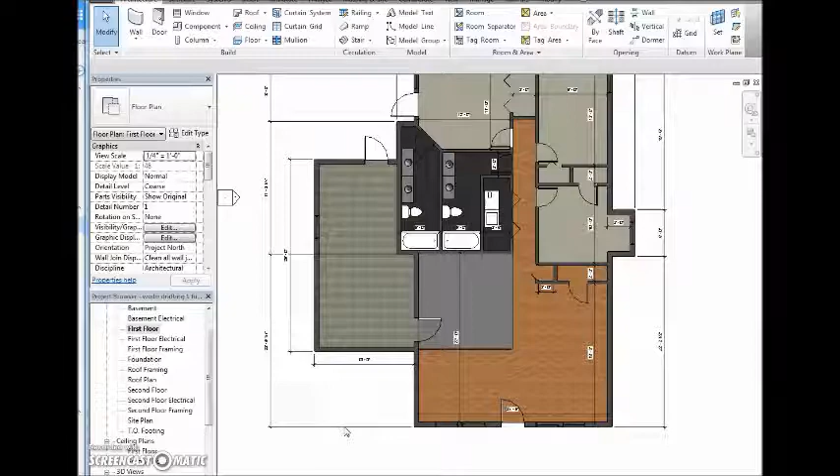All right, guys, quick question for you. What did the fly say to the fly swatter? Nothing, flies can't talk, come on. Who do you think I am, stupid or something? Jeez. You guys, you're killing me here.

Okay, so we're going to do our kitchen now. Best way to start the kitchen is to place your appliances in first. We're going to do this a few different ways based on whatever you want to do with your kitchen.

If you want to go basic, you can click on the component button, and down here you'll see sinks, which you'll have to put in, refrigerators, dishwashers, and a stove someplace too. But I like going to Revit City and doing that. If you want to go the easy way, that's fine too, I could really care less.

Maybe some of you guys would like to sleep in some, but I'm going to go to range. Range is usually the best thing to find. The one I usually like using - here's a killer one right here - but I want this wolf range right here. It looks really cool, it's got red knobs on it. That's kind of my favorite one, so use that one if you want to.

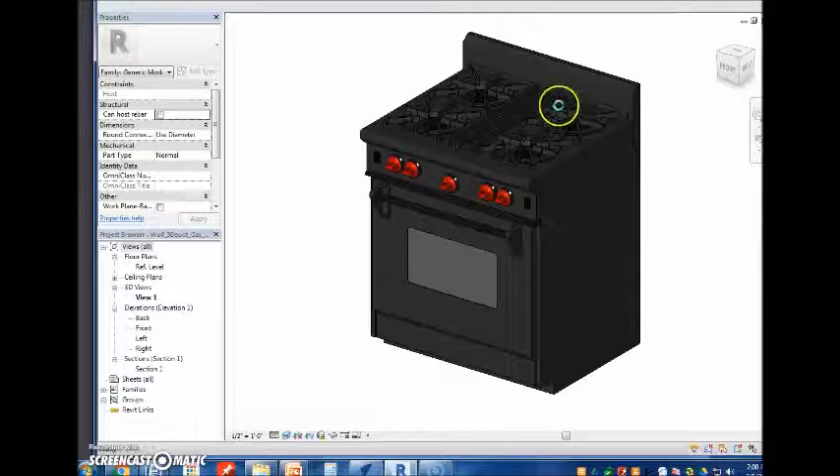Okay, spacebar is rotate. The back of your rotation object is where your cursor's at there. I'm going to dump this right here in the middle. Don't put it too close to your door because that would make no sense. Your range would typically go over here, your sink over here, because you have plumbing already installed. So if we want to get technical with this thing, that's where that goes.

Okay, I'm going to use the default sink, but the stove - let's go back to Revit City, and we will find a refrigerator. You can see I've spelled it out many times, sometimes right, sometimes wrong. Find a refrigerator that you like - I like the side-by-side one.

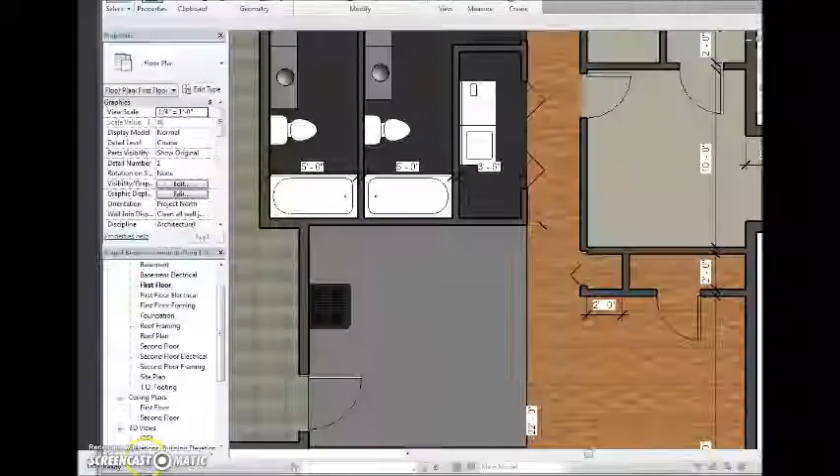Download now like you have. There you go, upgrade model. There it is, load in project. Hopefully you know how to do this, that's why I'm going a little faster. Okay, you see those little lines? That's the front of it. I'm going to dump this right here.

Okay, now sinks. Sinks can get a little finicky, but let's go ahead and dump the default one in here. Sinks are not very fancy, they're all about the same. I'm going to dump this right here, and I'm going to move things around as I feel I need to.

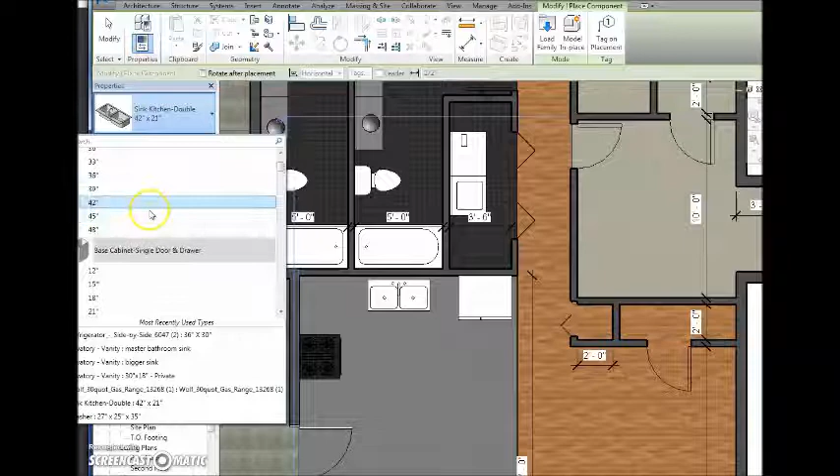But the next thing I need are the countertops - actually, let's do cabinets first. So under components, you need base cabinets first. Base cabinets are located here at the top. You should always put a 42-inch base double door cabinet under your sink, and just kind of center it right in there, and bump it up against the wall as close as you can. Now a lot of this is going to be eyeballed and guessed and things like that.

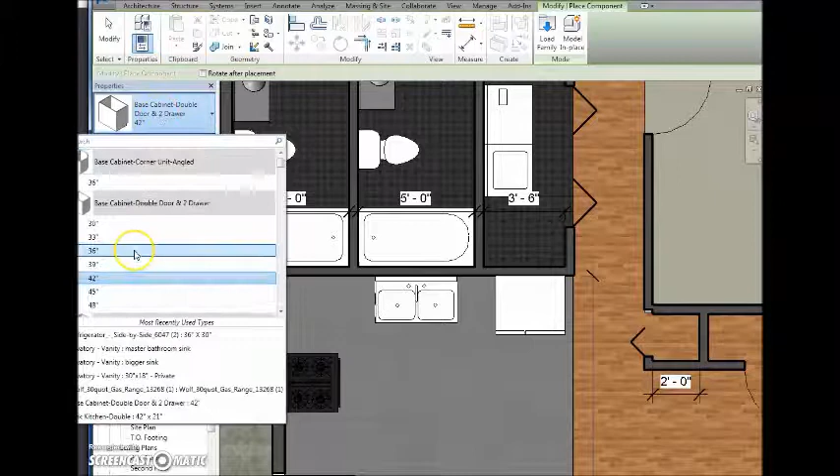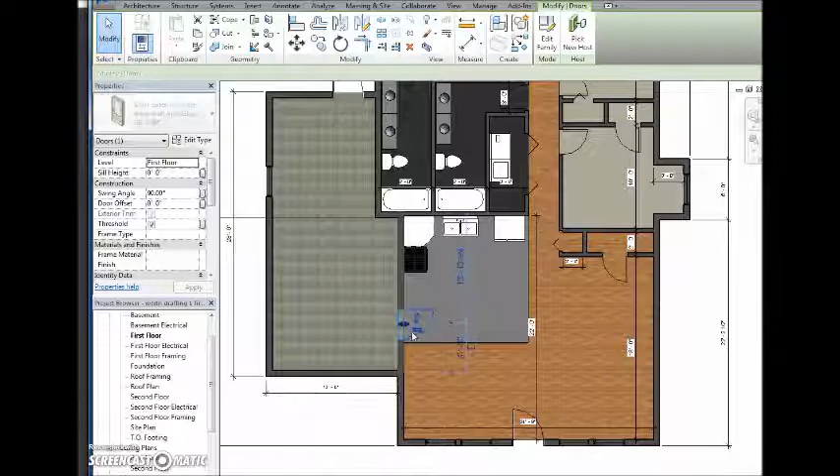The next thing I typically like doing is a corner cabinet - I'm a fan of those. If you're not, you can do your own thing. I like the base corner cabinets, spacebar to rotate it. If you have to move your stove over one way or the next, I'm probably going to move mine up here so it's next to there. You are allowed a little spacing in between there, that's fine. If you want to move your door down, if you decide you want more room here, you're welcome to do that - hopefully it doesn't mess with your roof much. But try to keep your door on the tile. So I give you guys a little freedom to move around.

Alright, so up here, this is a very tight space here. Let's see if I can fit a smaller cabinet in there - a 12-incher, close. You may have to move some stuff over to make it work, but I'm just using the arrows to toggle things. There we go, move this over a little bit more, that way that looks nice. There we go, need to put one more right here. I don't know what your measurements are, you might be the same as mine. 24 inch, too big.

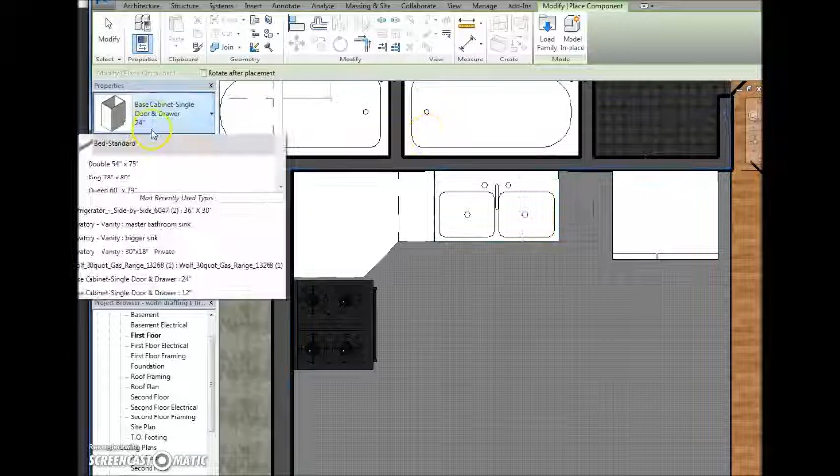18 inch, just right, should be a really tight fit. I'm going to do some 18 inches right here to finish out my other counters. That should be about fine. Make sure they're lined up, try to move them back.

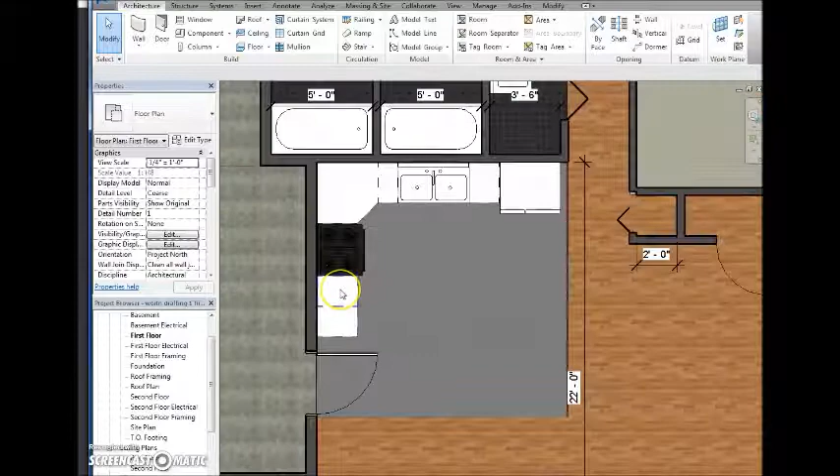Let's do a camera view so you can see what it looks like so far. To do a camera view, go to the little house thing up here, and under that is camera. Click in front of whatever you want to view, draw out your mouse, and now you have a camera view.

So it doesn't look too bad so far. You see how it's laid out. Don't worry about the fact the sink is risen above it. Once you put the countertop on, it should level it off.

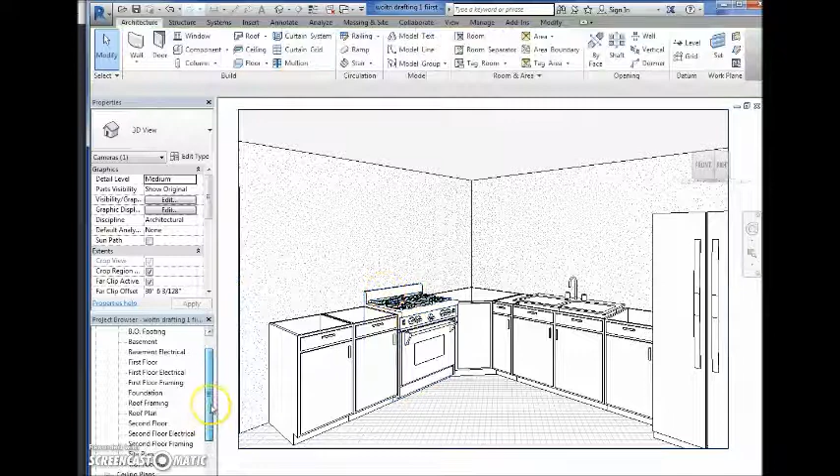But now I need to do a countertop. So click first floor. I'm going to do this in a way I've never taught it before, because another student of mine showed me how to do this. I thought it was a really cool idea.

We're going to sketch in the actual countertop in order to keep from having to move around all the buttons, which I think is going to be a little bit easier.

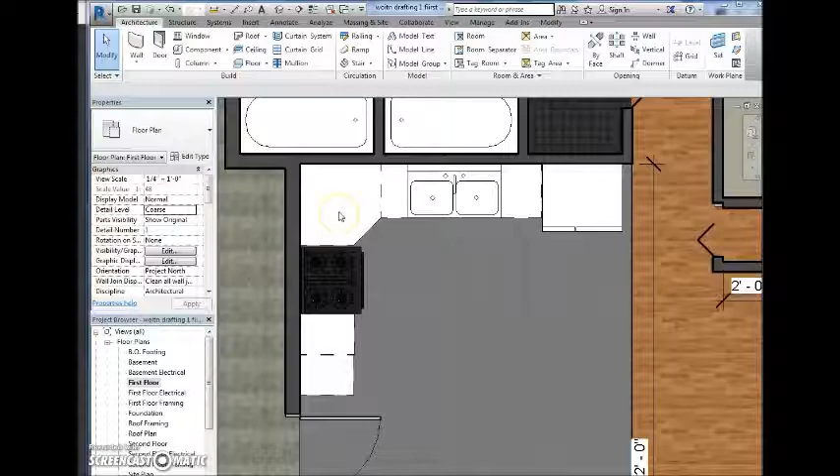Okay, let's go find some countertops. Go to components, we'll do the straight one first, that's the easiest one. Go to load family.

Press spacebar to rotate it. You're saying it's too big width. I say that's fine, just notch it in there.

Bring it down so it doesn't cover your stove, and it should be right there. You usually have a little bit of an overhang right here, but if you're not, that's fine.

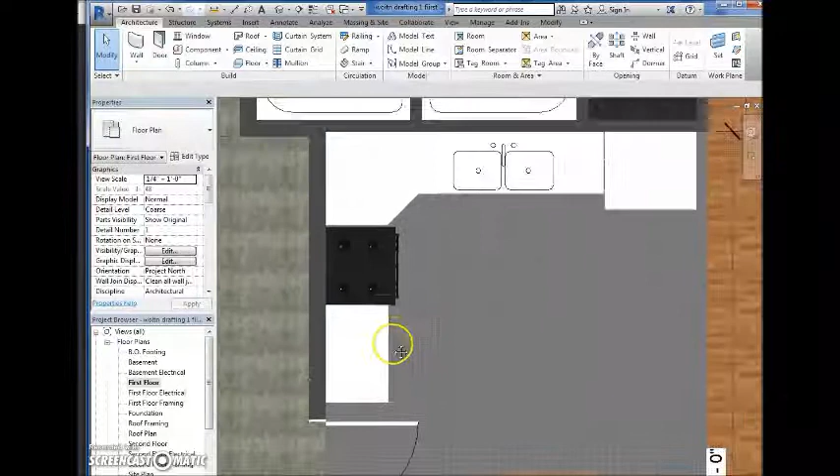That's the easy one, here comes a hard one. Go back to component, go to load family, go back to casework. Now, since we have an angled countertop with that funny looking corner, we have to do this one right here: the L-shaped with sink hole 2.

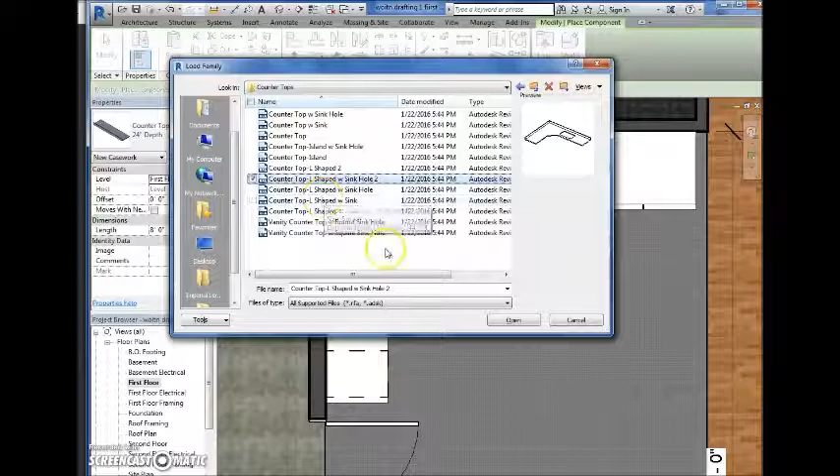Press open, okay, it looks like this. Yes, it'll fit-ish, but we're going to do some resizing. You see where the hole's at? We're going to have to reshape that a little bit.

So I'm going to drag this down first, that's the easy part, to where this is on the other side of my range. Drag this out a little bit so it goes over this.

Now for the hole. Unfortunately, there is no drag and drop, you have to use the coordinate system over here. So this is my sink location to the left. I'm going to go 4, 6 over.

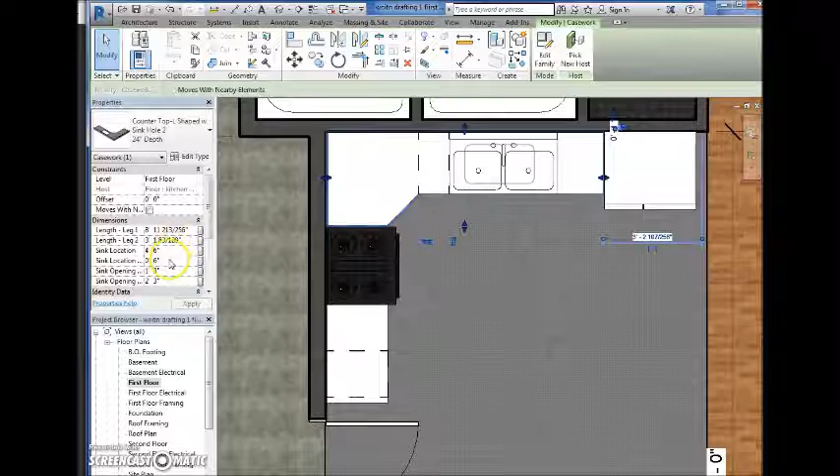Not bad, not bad. Sink opening, go 2'6" maybe, I'm guessing. Oops, 2'6", can't make it that big. It says it doesn't like that.

Okay, let's try this one. There we go, that's the right way. Okay, nope, 3 feet. You may want to wait for me for a minute because I'm going to figure it out. Figured I'd know this by now, but I don't.

Okay, as you see, it's over this way. I need to bump it back the other way, so I need to mess around with the little location. I'm going to go 4, 2.

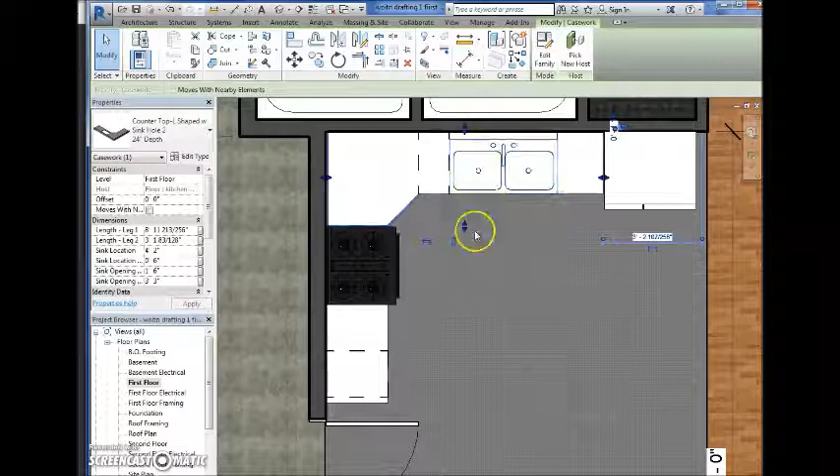So that should be close enough to where it doesn't look too awkward. If I want to go bigger on the opening, I could go 1, 6, but that's not a huge deal. As long as it's not covering the inside of the sink, you won't see it. So that wasn't too painful.

So now let's do the overhead cabinets. That's pretty simple, so you're going to go to component. Oops, save project, save when asked. Always save if you need to.

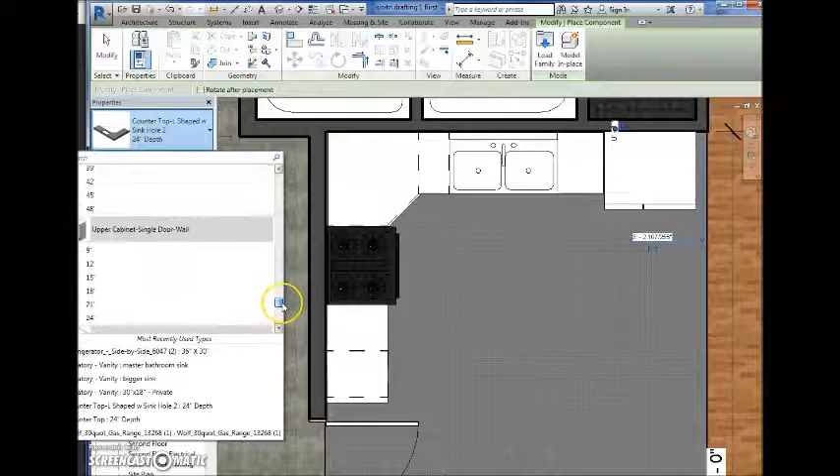So we're going to go to component again. The overhead cabinets are located all at the bottom, upper wall cabinets, here we go, but I need the corner one first. So that has to be along the wall, otherwise this won't work. About there, so the other ones will be located underneath that.

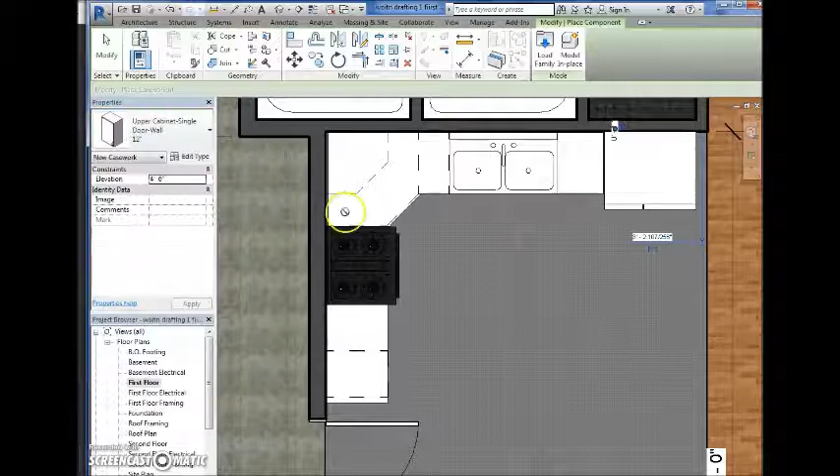So double, single, I'm going to go single next to kind of line up with the other ones, probably a 12-incher maybe. Oh, that works perfect actually. About right there. And then I'll do a bigger one over that, maybe 30-incher here.

Space bar to rotate it. Oh, that's lower, apologize for that, I don't know where that came from. Upper, there we go, so 30 upper here.

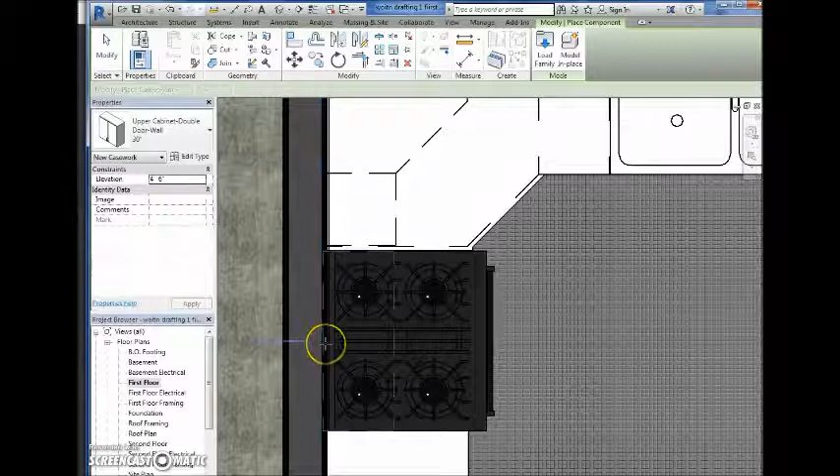Yeah, that's perfect. Make sure they butt up against each other and you don't have a lot of gaps. I'm actually going to go 33 on mine, just so there's not any gaps on both sides. You really want to try to avoid that if you can. Probably could have gone smaller, but this is fine for this.

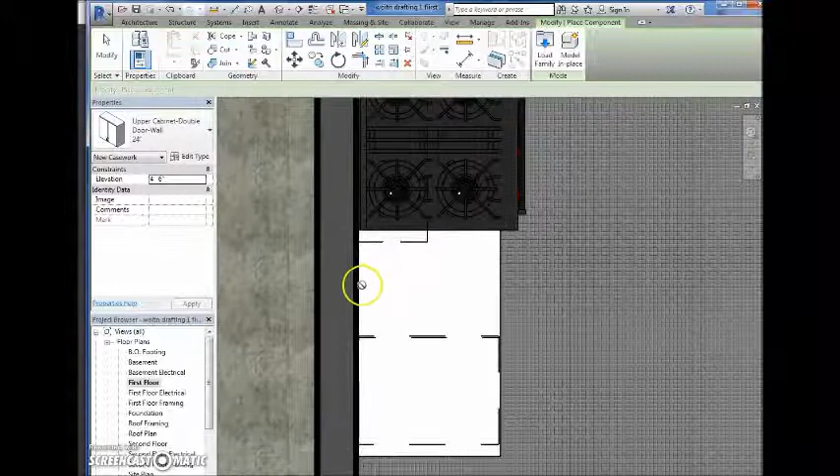And then I'm going to go smaller. Let's do a couple 24s. Let's do another 24 here. Got a little gap there, so let's go single here. You're just going to have to play around with yours and figure it out. So as long as it covers everything, you're fine, but just make sure that it covers it all.

There you go. Make sure it covers all the countertops and things. Not perfect, but that looks decent. So the same thing over here, we need overhead cabinets.

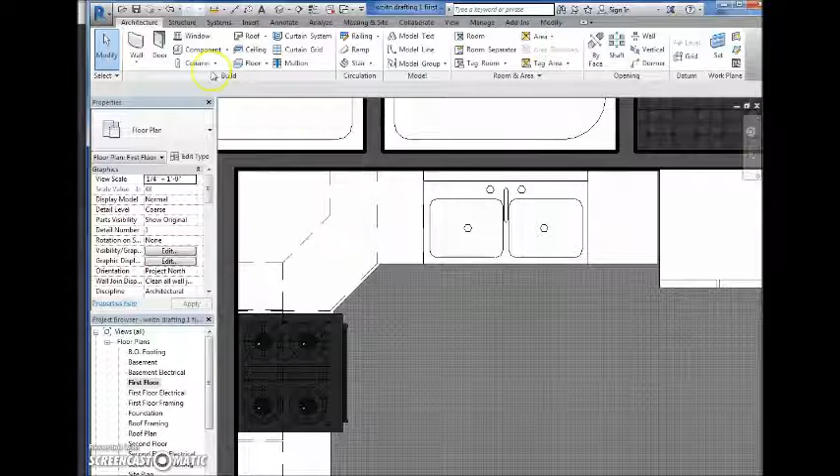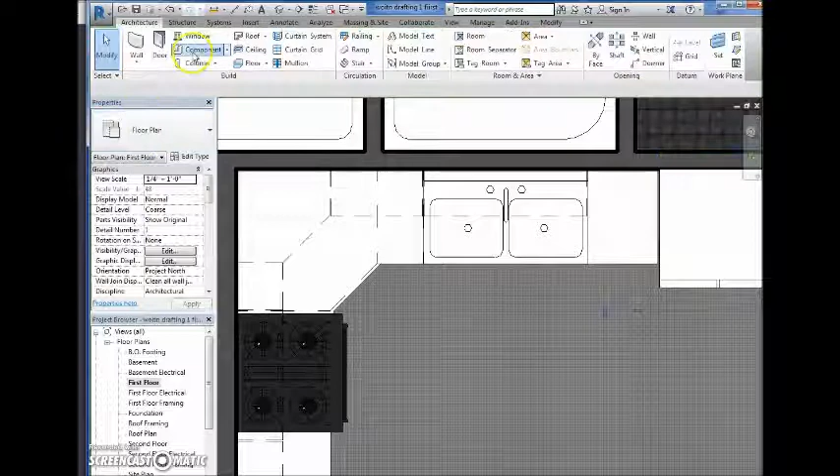Let's go, I have a feeling this may work. Ooh, look at that. Snug in there. Snug as a rug and a bug. 42 here, that was the same size as the other one, I know that for a fact. Need one right here. Sometimes if you just want to click on the lower cabinet, press tab, you might be able to look at that saying, hey look, that's 18. So let's find 18 so we don't have to go through the cycle of that. And there we go. Okay.

Earlier, you guys made a camera. The camera's located right here. Please label these. That way you don't have to keep on clicking and making new ones. It'll save you some time. And look at that. Okay, the only weird thing is this little corner one.

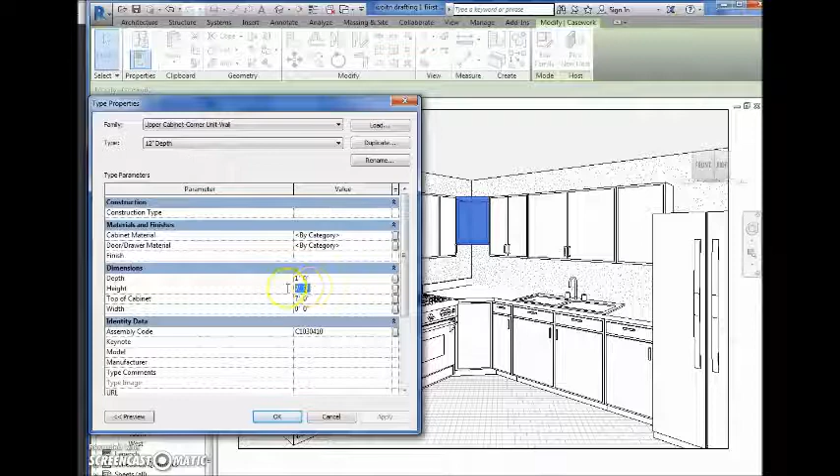If you want to make this as long as the other ones, it's very simple. Here's what you do. You choose edit type. You change the height to 2.6, 2 space 6. So do that. You notice it goes taller. Change elevation to 4 space 6. And there we go. You have a kitchen done.

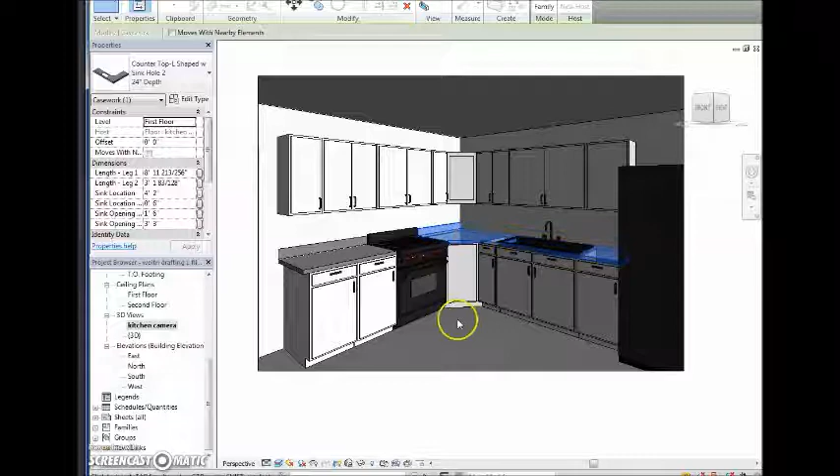Now we're almost done, because I want to add a couple colors to this. So go down to the little square thingy and choose realistic, and you'll see that it's really plain. I'm going to bump this forward a little bit. That way I can see the backsplash. It's a little close to the edge. Just go forward a little bit.

There we go. I feel like Bob Ross here talking about puffy white clouds. There we go. Now I can see the backsplash thing.

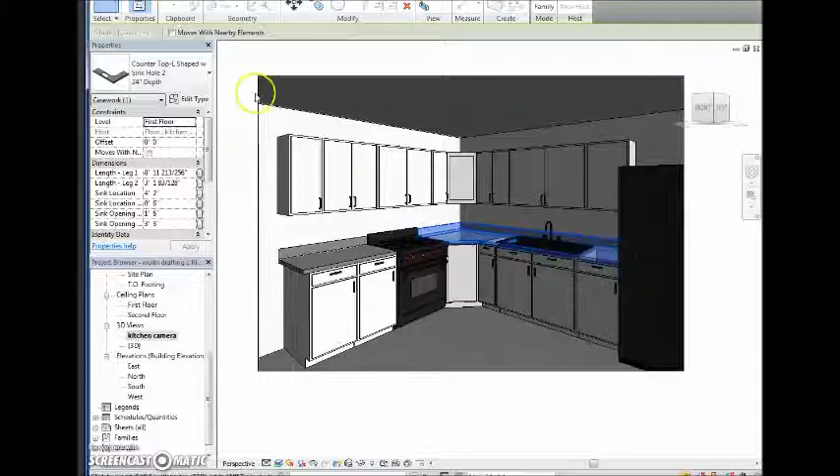Okay. How do we change the countertops? Well, you click them. You go to edit type. Okay. Finished material, countertop material right there. Okay, it jumped me to gypsum wallboard. I don't like that. So I want to find one on here that I can utilize.

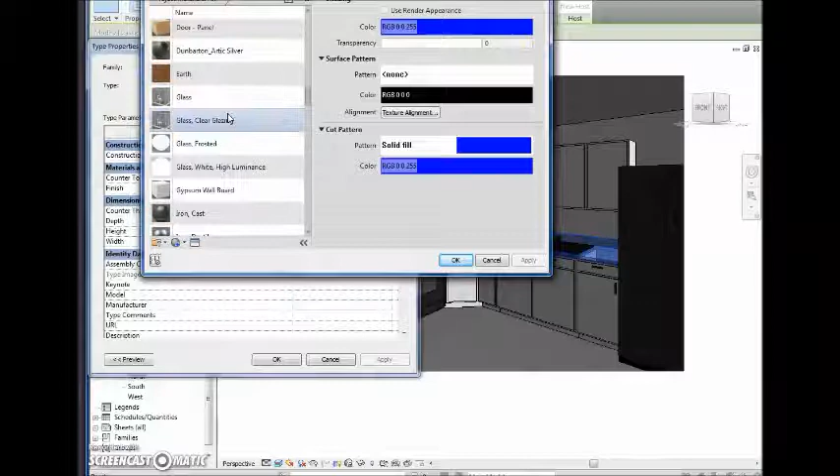What I'm probably going to end up doing is going to my tile that I made, the floor tile, and making a duplicate of that. Because it's much easier to make a duplicate of something than making your own, because it attaches things to it. So I'm going to go to kitchen floor. I'm going to make a duplicate of that. Call this one countertop.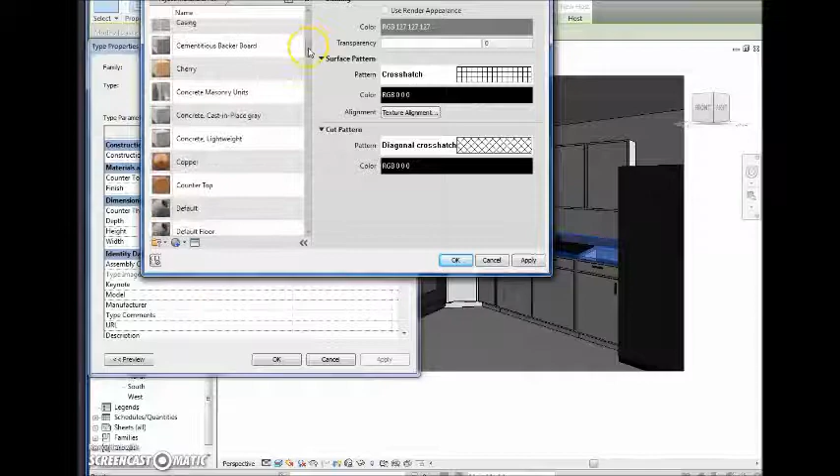The name you supplied is already in use. Okay, where is it? There it is, countertop. I guess we do already have one. That's ugly. Choose appearance if you don't want this wood colored your countertop. Why? That's weird to have wood countertop.

But go to, you can go ceramic. You'll have a bunch of different options here. You could go flooring, and you could go to the stone also. That's fine too. They're all the same. So, but I'm going to go to the ceramic one.

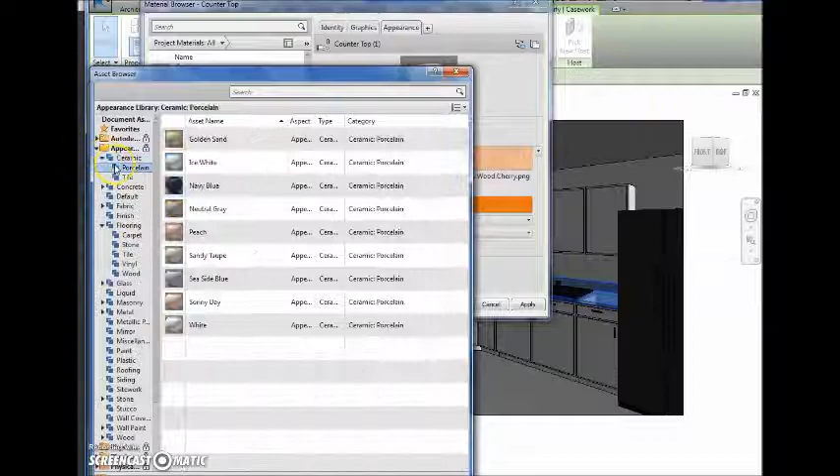That's porcelain for your toilets. There's tile. So either one works, guys. It's totally your choice. I'm going to go with this slate brown marble right here. Why not? That'll look good.

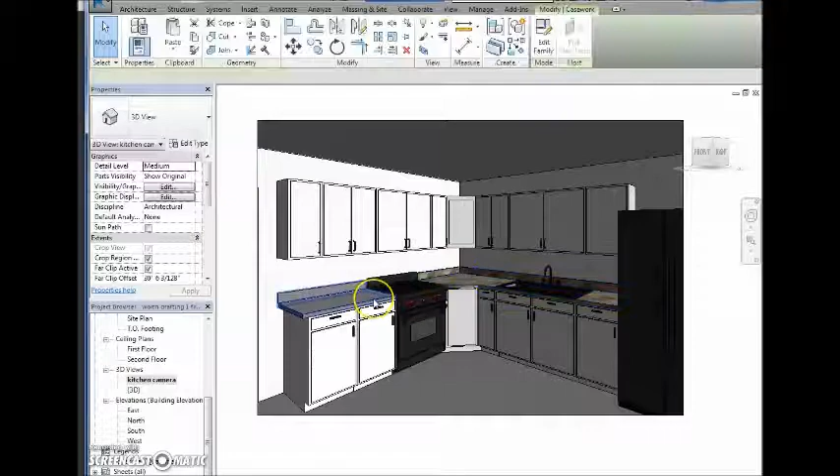Press OK. Press OK. Now this one's changed, but you have to do it on this one too. So it's pretty simple. Just choose edit type. Choose this material, and then it's just right there. So that'll work for that one.

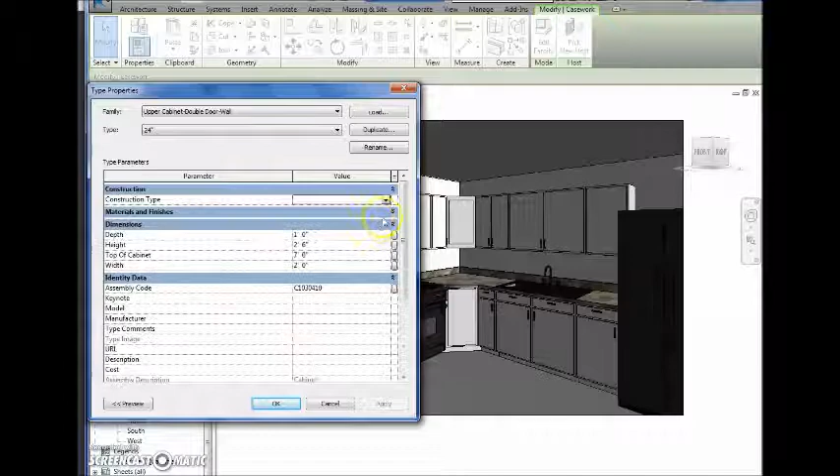How to change the cabinets? Well, same basic features, guys. You choose edit type. Okay, cabinet material. Oops. Click in this. Cabinets are right here, so they're white right now. Here's how you change them. You're going to go to appearance again. If you just click this color right here and you choose a color, it should automatically change them.

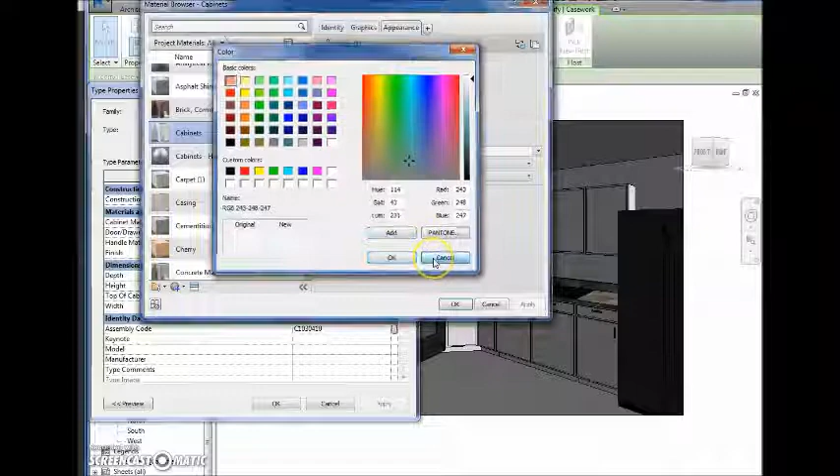So let's say I want to do, you can do a material if you want to. It doesn't make a difference to me. Let's say you want to go wood. Okay. Let's say I want a wood finish. I want a natural finish on this thing. So that's easy enough to go wood. And then you just pick yours.

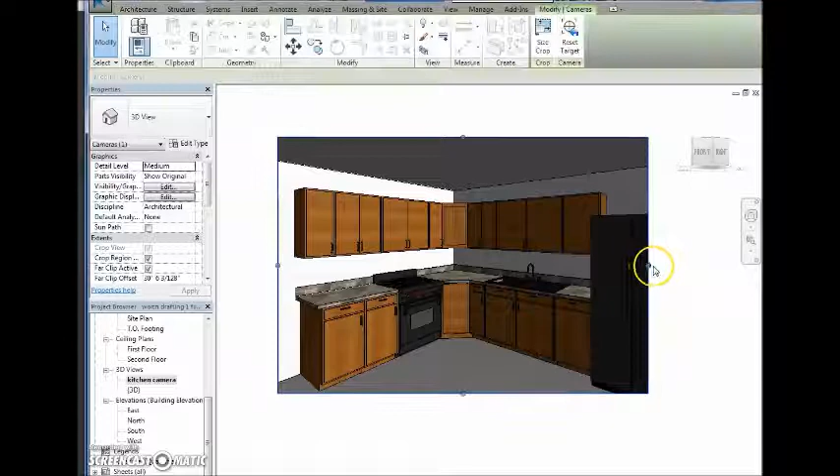Press OK. Press OK. Most of them should change now, and actually all of them just did, so I'm done. So easy as ever. So now you have your cabinets ready to go. You have your fridge, you have your sinks, you have your kitchen is done. Good job. Hopefully you made it through that without any fuss.